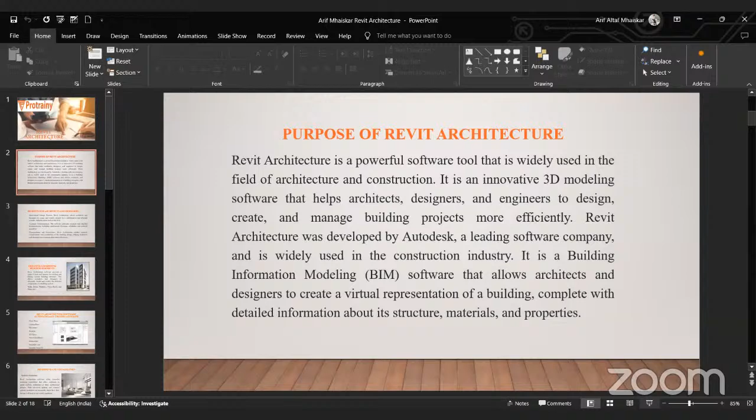Yes, sir. You want to ask something? Sir, you may continue. Yes, sir. I can't hear you. Sir, you can continue the question. Okay.

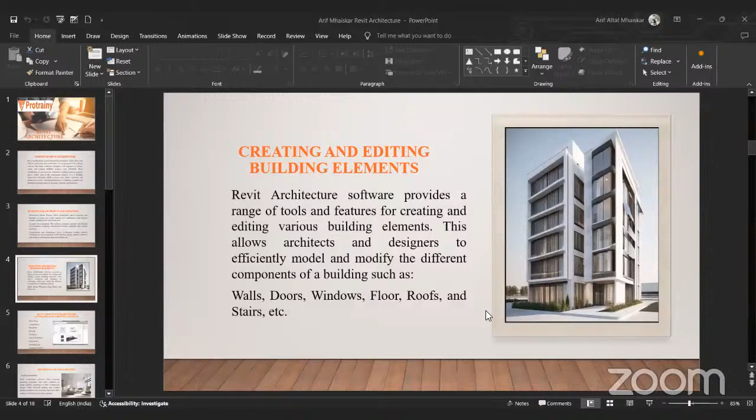Creating and editing building elements. Revit architecture software provides a range of tools and features for creating and editing various building elements. This allows architects and designers to efficiently model and modify the different components of buildings such as walls, doors, windows, floors, roofs, stairs, beam, column, structural slab, structural foundation. Whichever tool we want, we can modify and put in our model.

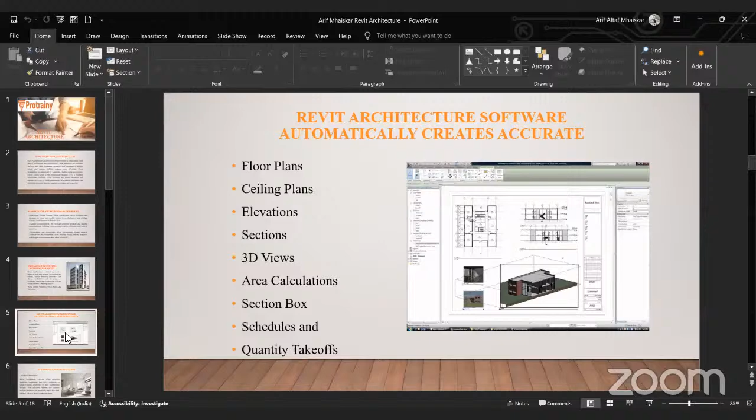Revit architecture software automatically creates accurate floor plans, ceiling plans, elevations, sections, 3D views, area calculations, section box, schedules, and quantity takeoffs. As I told you, within one click, we can get elevations, we can get sections, rendering and visualization.

Realistic rendering. Revit architecture has powerful rendering capability that allows us to create realistic renderings with advanced lighting and material options. Architects can accurately depict how their designs will look in real world conditions. Because when we are working on a project, we can't share a Revit file with a client. We just have to put some rendering images to the client of how their project is going to look, how their bedroom is going to look, how their living room is going to look.

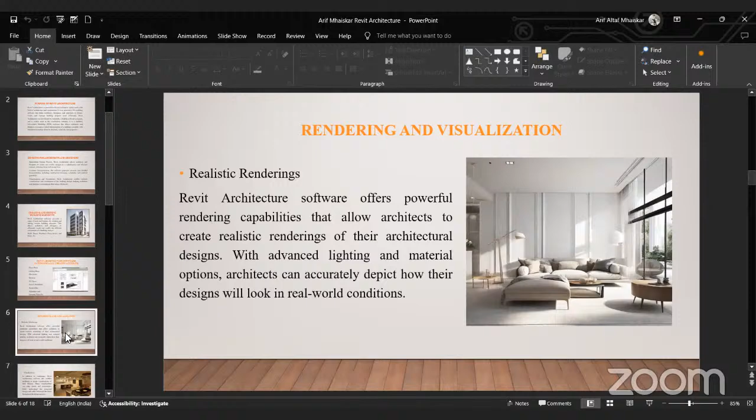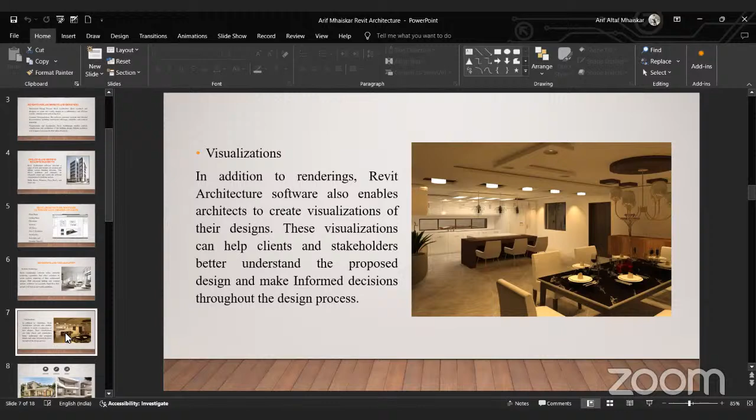Visualizations. In addition to renderings, Revit Architecture software allows architects to create visualizations of their designs. These visualizations can help clients and stakeholders better understand the proposed design and make informed decisions throughout the design process, as I mentioned before.

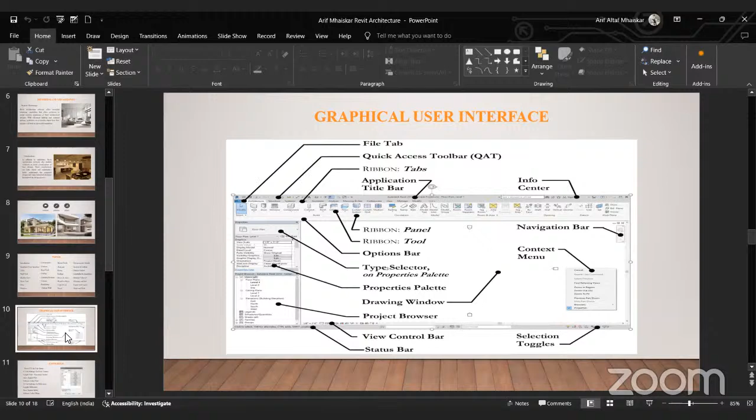This is the graphical user interface of Revit: file tab, quick access toolbar, application title bar, info center, navigation bar, context menu, project browser, view control bar, status bar, like that.

Wall tool. Like other basic elements in a building model, walls are predefined system family types which represent standard varieties of wall function, composition, and thickness. Basically, there are three types of walls in Revit. First one is the basic wall, second one is the curtain wall, third is the stacked wall.

Now, a basic wall is like a brick wall. If we have to design a 9-inch wall, we have to change the assembly: first, the main brick will be 8 inches, and we will add the inner plaster and the outer plaster. The outer plaster will be 0.6 inch and the inner plaster will be 0.4 inch. So when we total 8 inch, 0.6 inch and 0.4 inch, it will become a 9-inch wall.

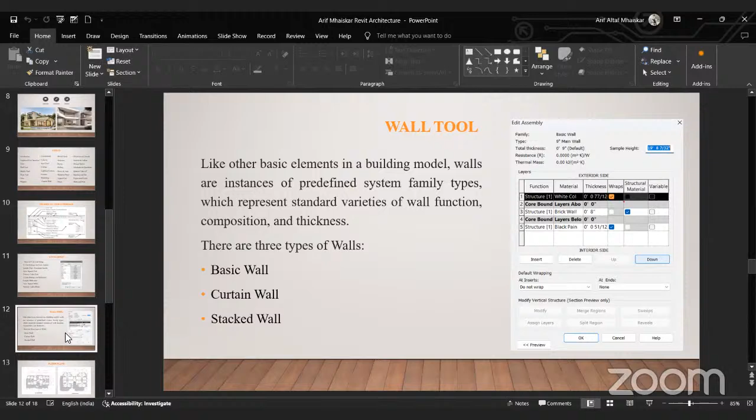A curtain wall basically is a glass wall. We will add mullions in a curtain wall, and a stacked wall is used in a kitchen or, we must say, in a bathroom.

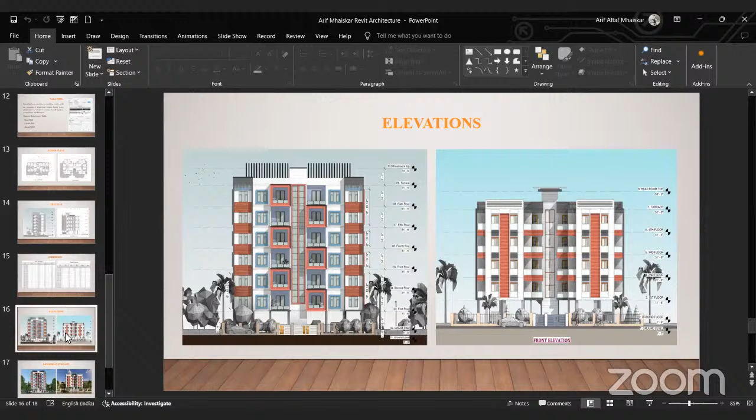These are some floor plans of buildings. These are some sections, elevations, cutting the staircase. These are the schedules and quantities, these are some elevations, and this rendering is done in Lumion. This rendering is done in SketchUp. These are some elevations. Okay, that's it.

Hello. Hello. Hello. Hello. Good evening, sir. What happened? I already completed the session, ma'am. Hello. Yes, what? I have completed my presentation. Okay, you have completed. Okay. Okay, so should I end this session now? No, just wait for 3 minutes.